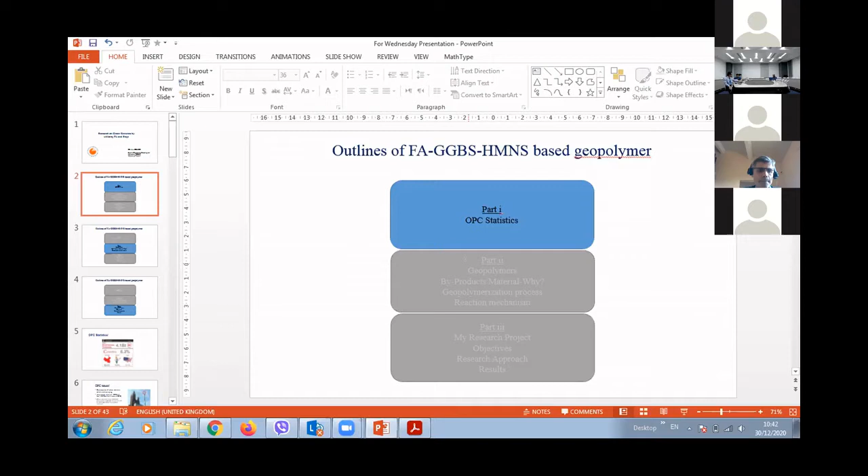The first section gives some statistics and issues about OPC. Then we move to geopolymer or alkali activated materials, the process and mechanism. The last part covers the research objective, research approach, and results.

Starting with the first part, statistics about OPC: as you see in this picture, the production of OPC keeps growing dramatically in the world. According to statistics from 2017, the production worldwide is 4.1 billion tons. That production is mainly divided among 3 main regions in the world, coming first China, followed by India, then the US.

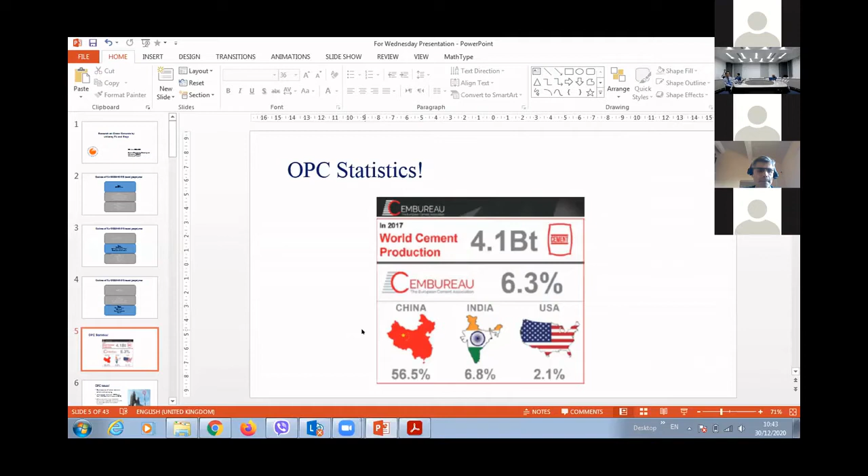This mass production of OPC creates a lot of problems and issues. These issues can be described in the consumption of natural resources, because it requires quarries, and also intensive consumption of energy. To produce 1 ton of OPC requires more than 125 liters of fuel and more than 118 kilowatt hours of electricity.

The second main point is the emission of CO2 into the atmosphere. About 8% of the world's CO2 emissions come from the production of cement and concrete, which is 3 times more than global aviation. Also, the main properties of products made from OPC give very poor immobilization of contaminants when used in different environments, and cannot resist harmful chemicals when put in the soil or ground.

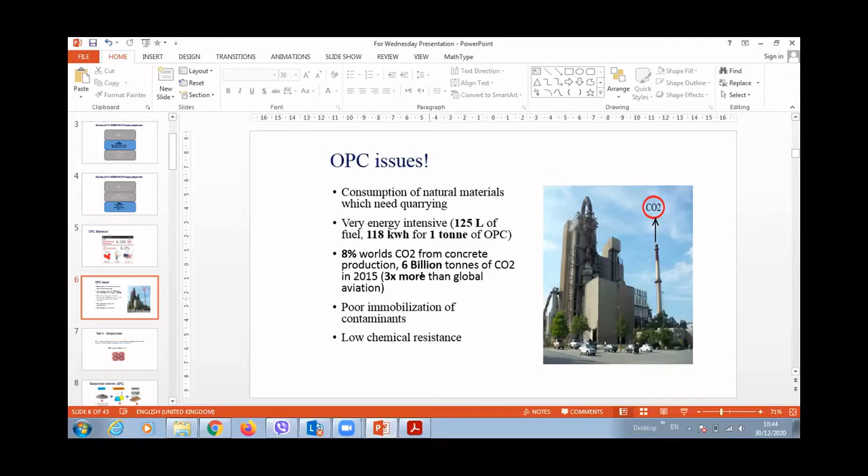Moving to the second part, geopolymer, or sometimes called alkali activated materials. What is it? It's a family of mineral binders.

These geopolymers mainly share one common property, which is the crystalline phase or amorphous phase of each mineral. It is very similar to zeolite, because it has a combination of silicate and aluminum present in amorphous form or microstructure. For this reason, it has properties very similar to zeolite.

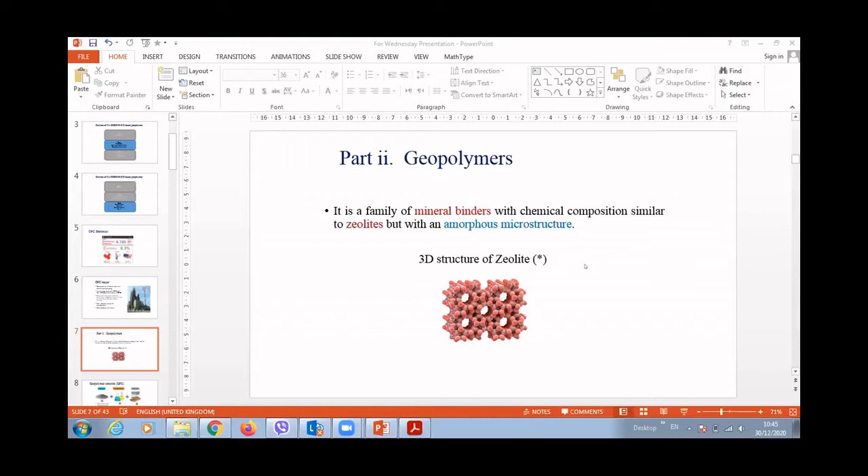In a simple way, what is geopolymer? It's a combination of a raw material, generally precursors coming from byproducts, then activating this raw material using different chemical solutions, mainly alkaline solutions, and then adding a filler like aggregate or sand to produce or obtain your mortar or concrete.

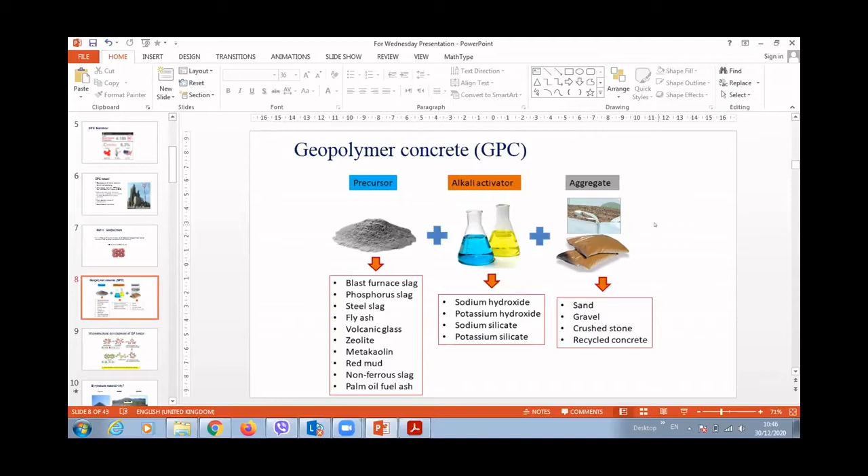What's the main mechanism in geopolymer or alkali activated materials? It's mainly based on how the chemical solution reacts with the binder. For example, if we use an alkaline solution based on sodium silicate and sodium hydroxide, that solution will dissociate the material, mainly fly ash or slags, and that dissolution produces anions and cations, which react together to produce a gel.

We call that the gelation phase. That gelation phase, with more rearrangement and orientation, builds new bonding and new links, formulating the growth or polymerization process, then the hardening process.

So why byproduct material? We can see that the main byproduct materials that exist widely in the world are fly ash, and other slags like magnesium slag, kaolin clay, rice husk, or different other materials.

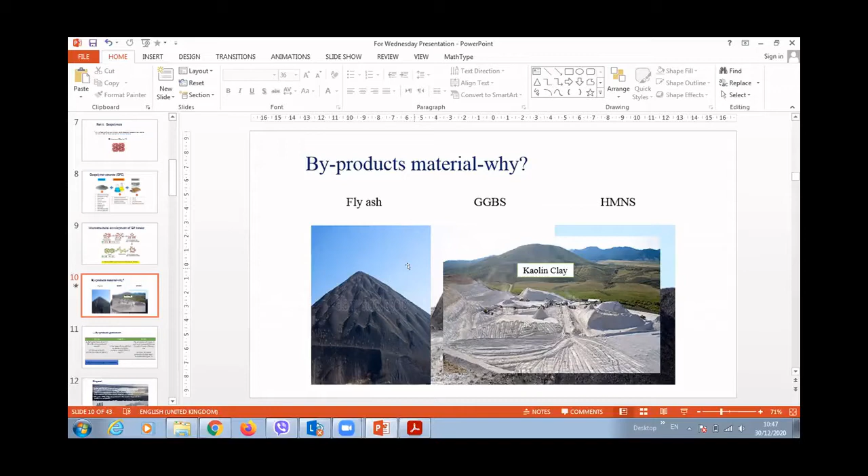So why this raw material? Some statistics present in this table show the massive production of each single raw material or byproduct material in the world, coming from the US or different countries like the EU or China. All the numbers here are in million tons.

For example, fly ash in the US production is more than 131 million tons yearly. In the EU, it's more than 125 million tons a year. And the quantity is quite double in China and India alone.

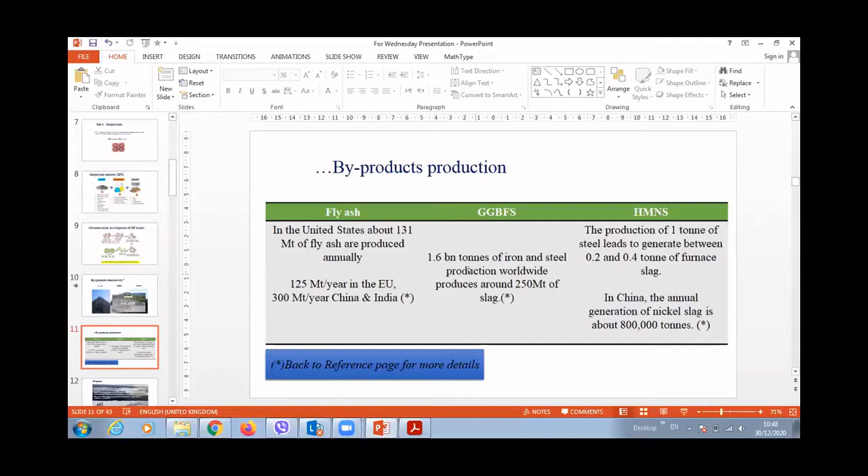The same for steel, the production is 1.6 billion tons of iron, which can give us or produce 250 million tons of the slags. So the ratio between, for example, the slags and the main materials comes from like steel is like 0.2 to 0.4.

So the main problem proposed by this waste material or byproduct material in the past was disposal. The fly ash, for example, used to be entrained in the flue gases and released at the atmosphere. But new legislation in the US forced and required the producer to capture that fly ash and recycle it or dispose it in controlled places or areas.

However, more than 65% of the fly ash produced in the world is disposed in landfills or ash ponds.

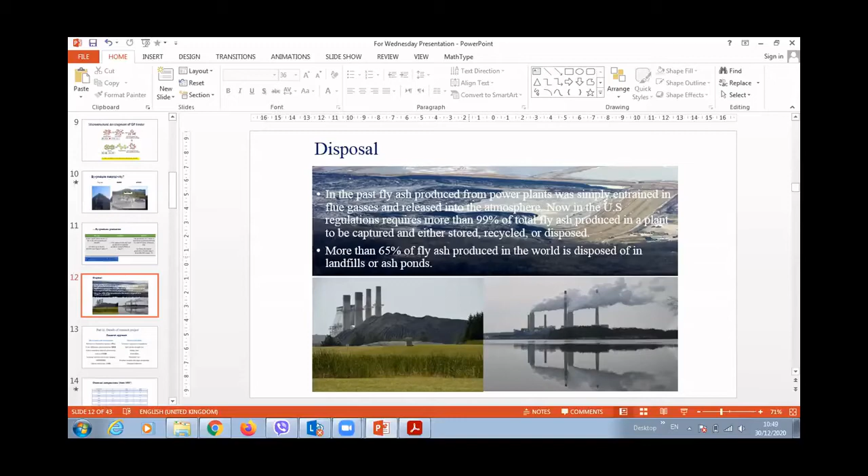Hello. Yeah. You have some. Yeah. Yeah. Okay. Because I can't hear anyone.

So moving to the third part, about the research project and the results we came out with.

So the research approach was divided into investigations in micro/nanoscale and macroscale.

So for the nanoscale, it's the characterization and defining which kind of material and final product we use. We follow particle size distribution analysis (PSA), X-ray diffraction, XRF for chemical composition, FTIR for bonding, and for microstructure we use SEM EDX, and also optical microscopy for the concrete to see the bonding between the aggregate and the paste.

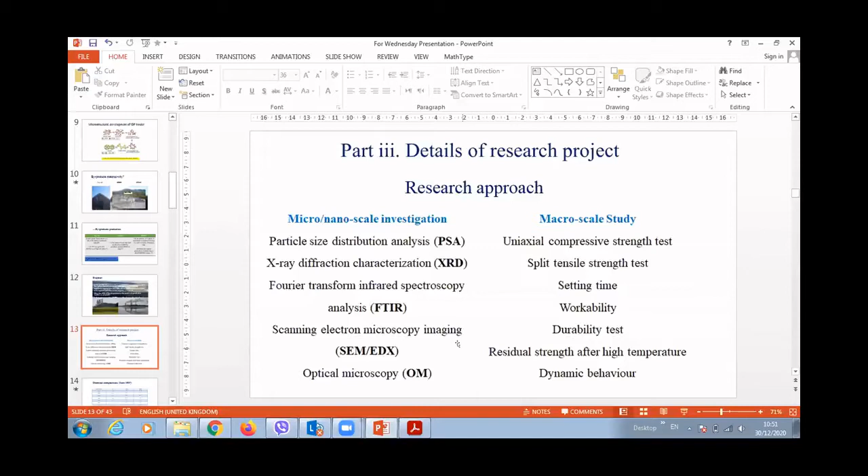On the other hand, the macroscale study focused on hardened properties: compressive strength, splitting strength, and fresh properties like setting time and workability. We also studied durability using a chloride diffusion test and residual strength when the product is exposed to high temperature up to 1,000 degrees, and we studied the dynamic behavior of the paste.

So it's the highest value when loaded with GGBS. Certainly, when combined and loaded with high magnesium slag, the optimal formula we obtained was GGBS loaded with high magnesium slag. It gives us, with 10% from the magnesium slag, the highest compressive strength, 60 megapascals at 28 days.

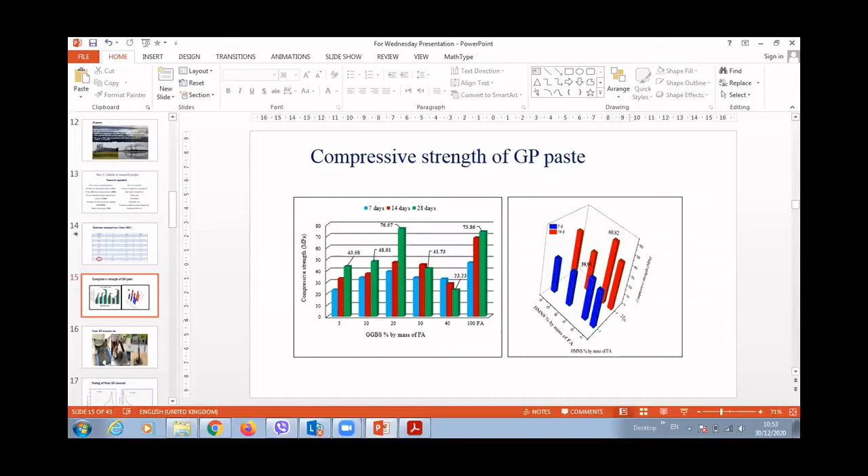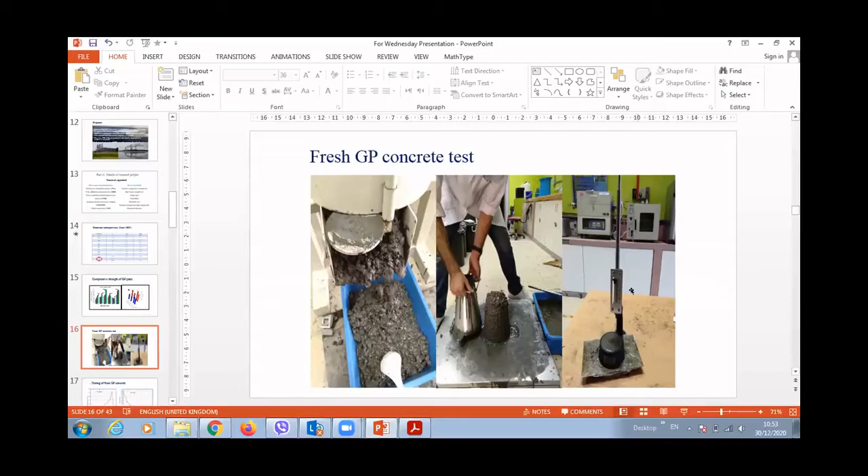For the fresh properties, we tested the slump test and the setting time, for paste setting time and slump test for the fresh concrete, as you can see in the pictures. It has a very good slump, as shown here. For setting time, it's quite longer because this tests for the paste only. Usually the geopolymer has a very long initial setting time, then quickly hardens at the final time. For slump, we used repetitive slump tests to see how it keeps its slump with time.

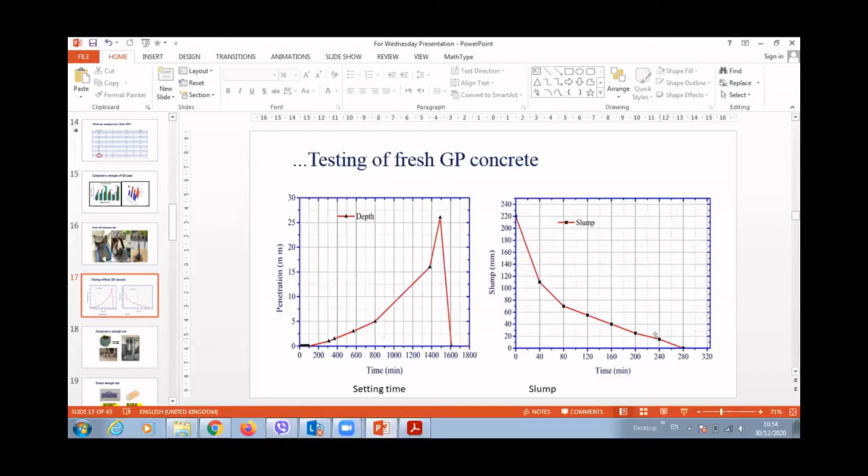After 40 minutes, we did different slump measurements to see what happened. The initial slump was like 22 centimeters, very workable concrete with very good flowability. Then the slump reduced with time, but it kept its workability until almost 4 hours.

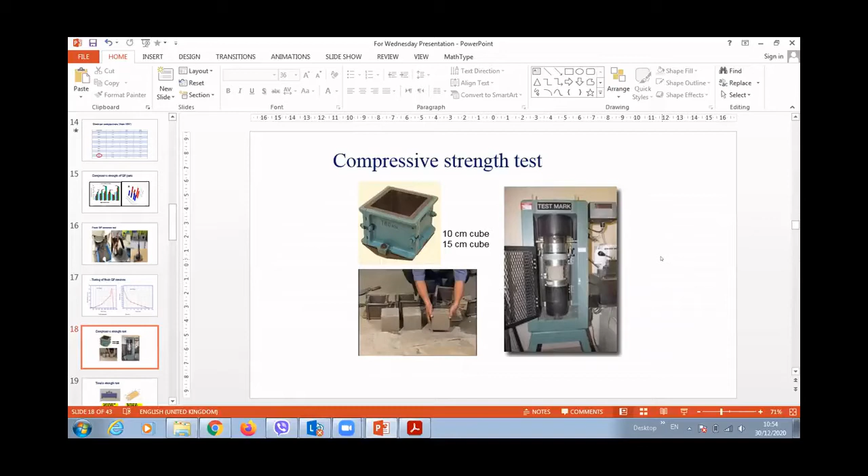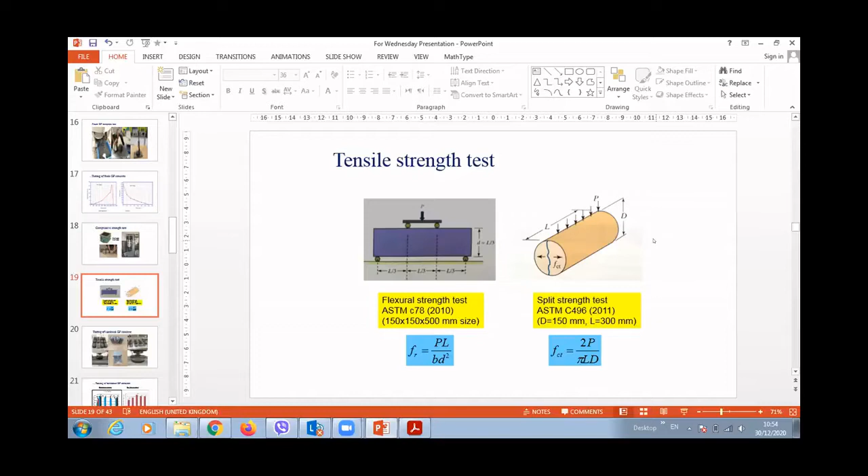This picture shows the regulation we followed to test the compressive strength: a cubic sample of 10 by 15 centimeters, following ASTM standards. For splitting, we used cylinders and calculated the splitting tensile for the concrete. The cast samples, as you can see here, are both cubic and cylinders, and the tests were carried out.

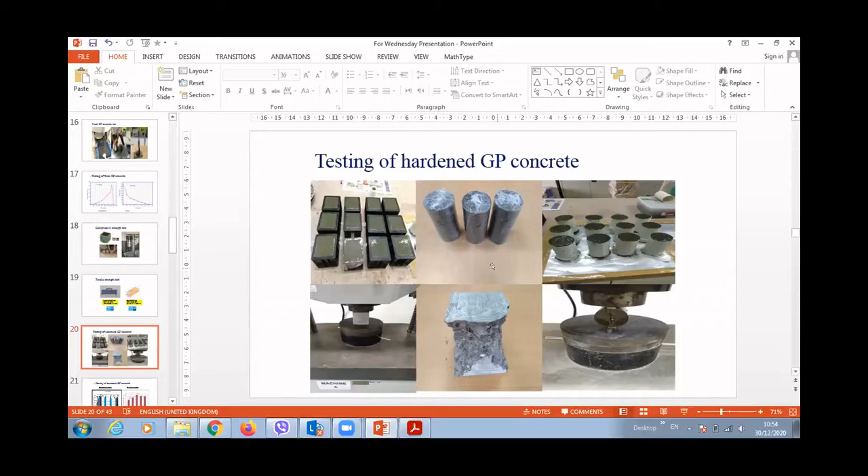This is the result for compressive strength and splitting strength for the concrete made based on the main formulation we found for the geopolymer paste previously.

What we found here is that the compressive strength increased with time up to 28 days, then there's a slight decrease of 8 to 10%. We believe this decrease in strength after 90 days could be due to the continuity of the geopolymer reaction with the alkali activator and the binder.

This is because the chemical reaction and dissolving process for the alkali activator of the raw material goes faster initially, then continues slowly, called microreactions. This produces more free water molecules in the system or main matrix, which of course will affect the strength with time.

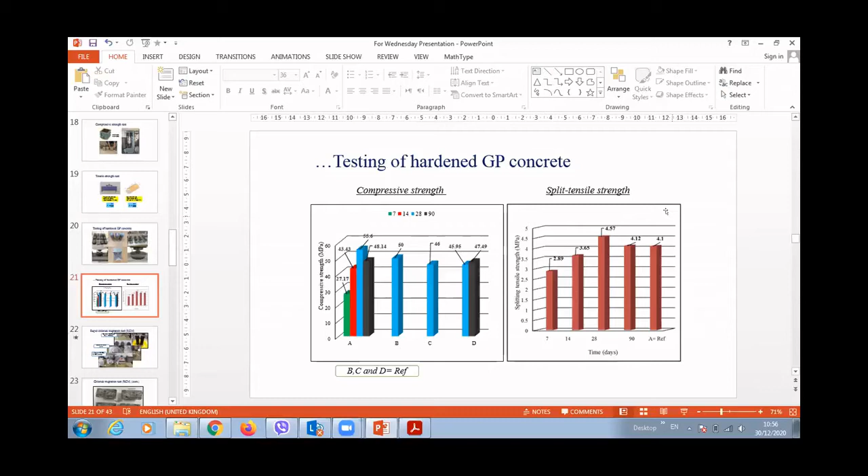The splitting tensile strength is shown on the right side. Because there's a linear relationship between compressive strength and splitting strength, it increased with time and decreased also after 90 days with a very slight decrease. But both results are very good compared to OPC.

The other test we carried out is the rapid chloride migration test for durability. We used a disc of 5 centimeters depth and 100 millimeters (10 centimeters) diameter. It was saturated inside calcium hydroxide to prevent any migration of other elements, cations or anions through the system after the vacuum process.

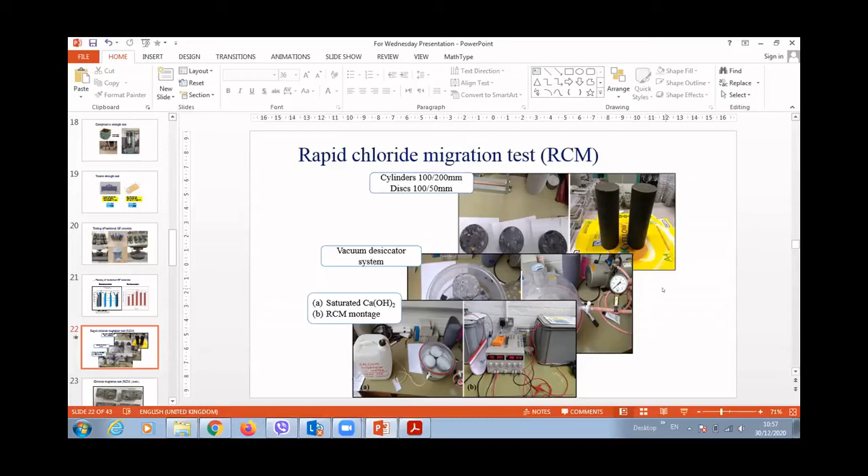Then we saturated it inside the mechanism or system, left it, and ran the test, getting results after 24 hours as per the regulations and standards.

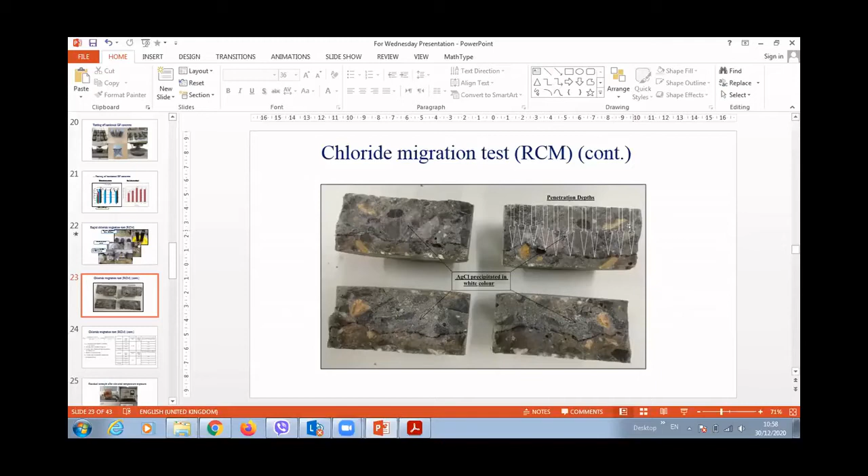So when we get the cylinders, we wash them, dry them, then split them axially and apply a nitrate solution to see the color change, because the nitrate reacts with the chloride that has migrated or diffused inside the samples. We measure the depth following the standards, and use these measurements along with Fick's first and second laws to calculate the diffusion coefficient.

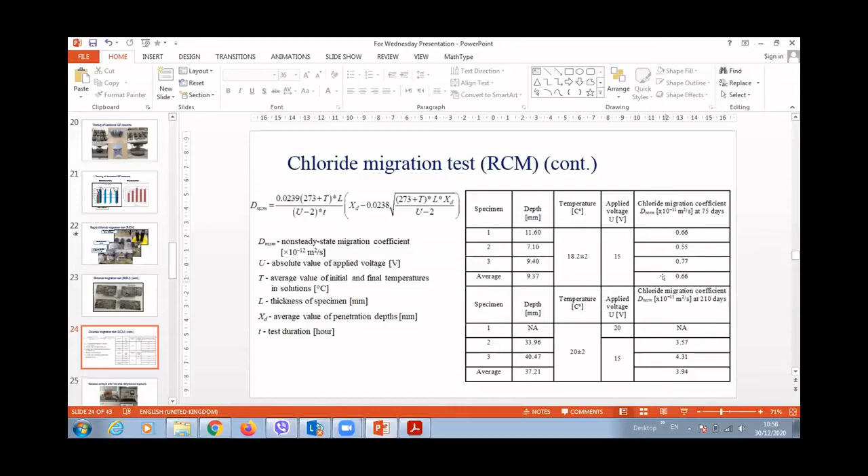The results give us a very good classification of the concrete, because the standards classify concrete as acceptable, good, or very good. For us, the classification was good, because the diffusion coefficient was very low.

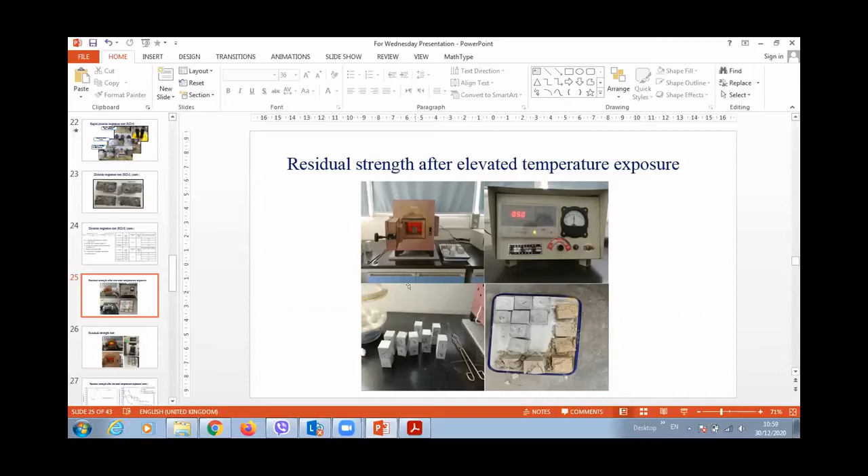The other investigation was about residual strength after exposure to very high temperature. This picture shows the electronic oven we used, with different samples cured for more than 3 months, then put inside the oven following this protocol: we heat the oven up to 900 degrees.

We put the samples inside the oven for 2 hours, then cool down just by opening the oven door and leaving them inside the room, and then go for the compressive strength test.

The results are compared against other results found for OPC and other geopolymer concretes with similar materials used. As we can see in the blue lines representing our results, the material we used shows very good temperature performance at different stages.

It has more stability compared to OPC or others. For example, from 300 degrees until almost 500 degrees, we have a more stable product, and then it decreases, but the decrease is slow, not a sharp or quick drop.

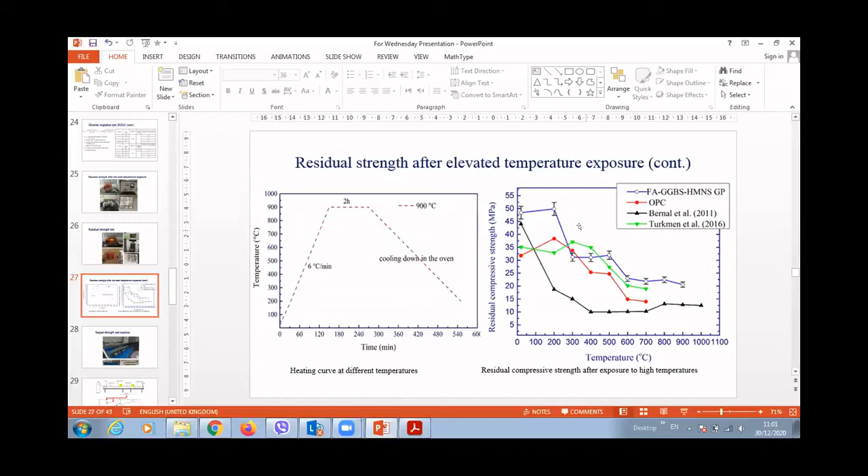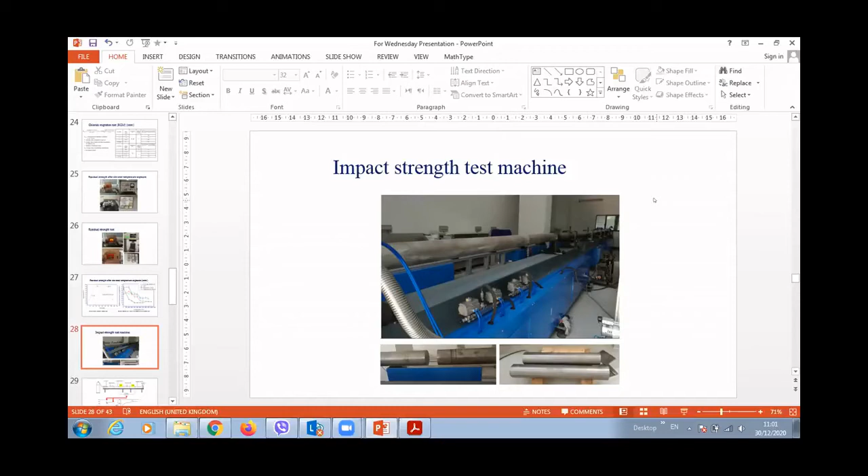The other main test we carried out is the impact test for dynamic behavior. We used the Hopkinson bar pressure test, which was carried out in China.

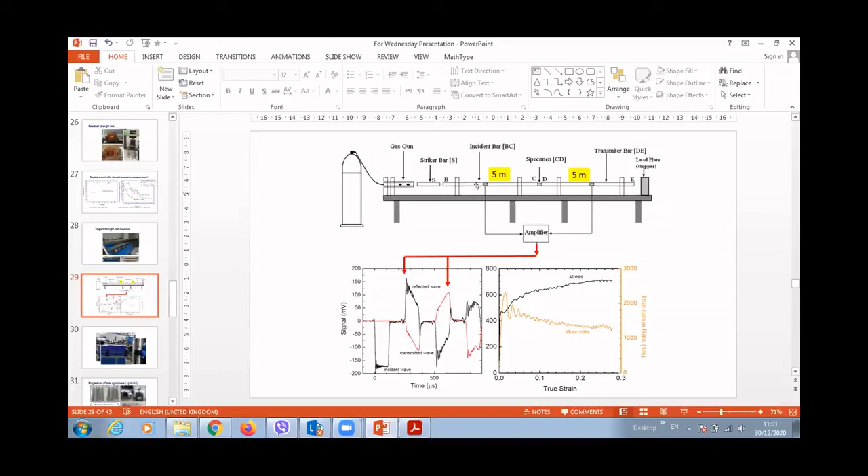The Hopkinson bar setup divides into two main parts: the first is the incident part, and the second is the transmitter part. Both parts are linked or connected with an amplifier to analyze the transmitted waves through the bars.

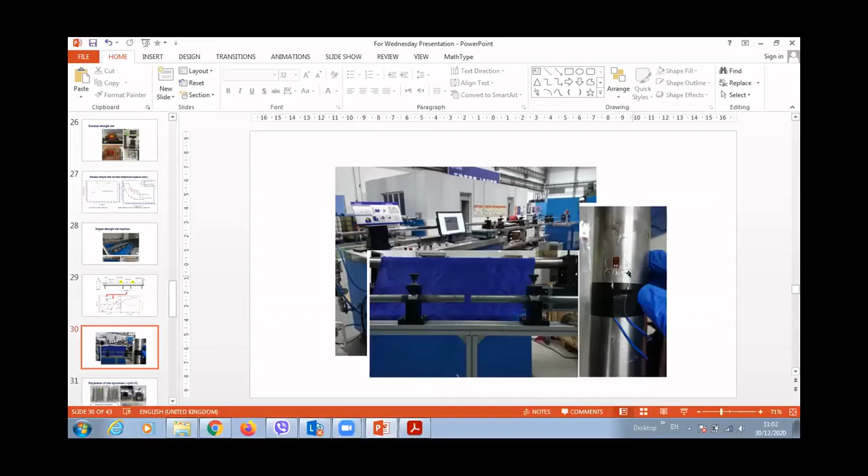To carry out this test, we need samples about 35 millimeters diameter and 18 millimeters thickness. For our case, we used 3 different diameters: 33, 36, and 37 millimeters. In each group, we used a different impact speed: 2, 4, and 6 meters per second. The samples were cut, polished, measured, and then put into the test.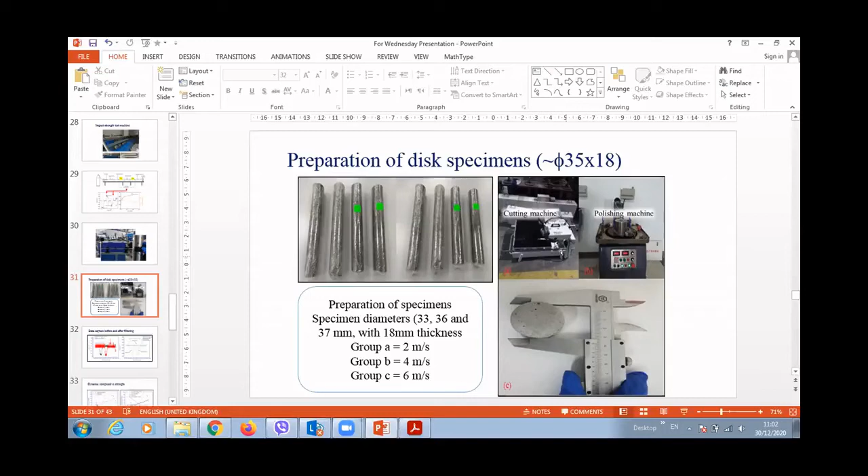Before carrying out the test, we need to calibrate the machine or equipment without any samples and filter the wave to see it clearly, as shown on the right side. The left side shows before wave filtering, and after filtering we can clearly see the wave of the incident side, the reflected wave, or the transmitted wave.

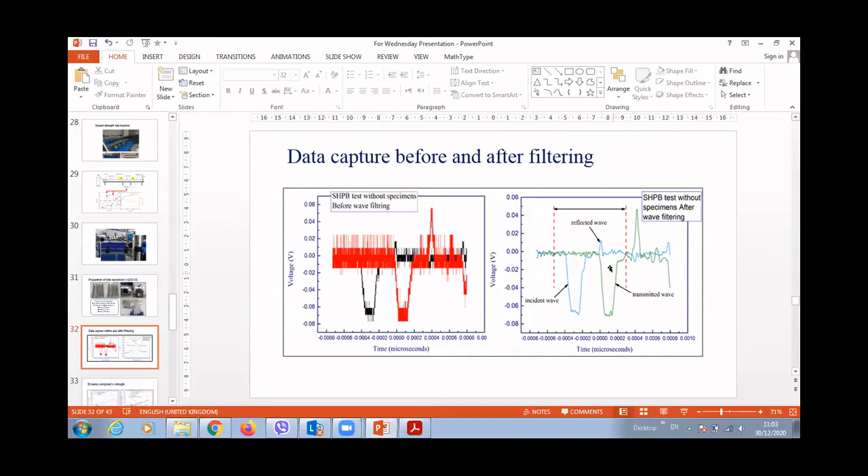Based on this information, we got the main data needed to analyze the behavior of our paste or samples. The main parameter is the dynamic compressive strength of the samples, and we can see here the stress against strain for all the groups.

We then applied the same strength and stress values found in other models, to see the convergence or difference between models that exist for concrete in general, not specifically for alkali-activated materials or geopolymers, and compared them with ours to see what the difference is.

So for us, we uploaded all of them in different groups, in different stress strain rates. We found that there is a very good agreement between our models in two different strain rates, which is limited by 63 per second, and then it goes for linear increasing.

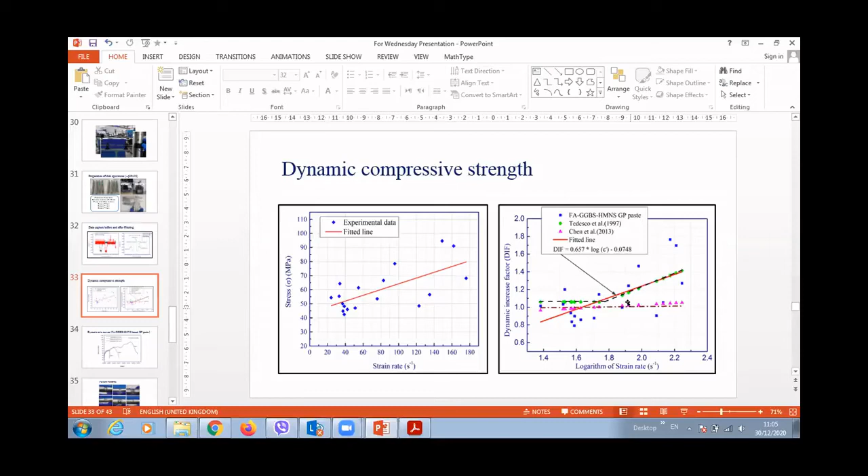This is explained by the curve of stress strain. This is an example for group 33 millimeters at different impact speeds. At the first stage we found that the curve has a very similar variation pattern, in which the stress first increased almost linearly with the strain, and this represents the elastic relationship between stress and strain.

Then it has a slow improvement, very close here to the linear stage, a slow improvement with the increase of strain, representing the hardening stage. And then finally, at the top, the stress reached the ultimate value and dropped quickly or harshly. This represents the compressive failure of the samples.

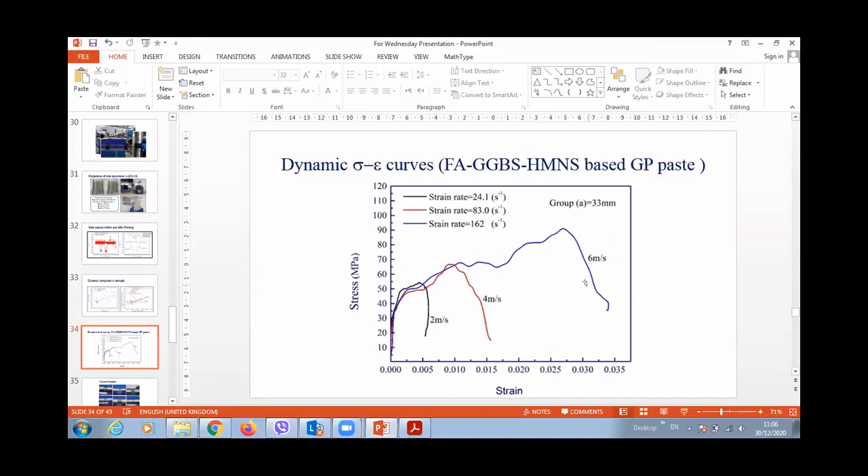To see this in reality, we captured pictures, because on each test we had a camera to capture the samples and the impact, at different impact speeds. We found that the samples crashed from big segments and big fragments into smaller, finer ones as the speed increased. And when speed increased, we found that the strength has a sensitive relationship with strain rate.

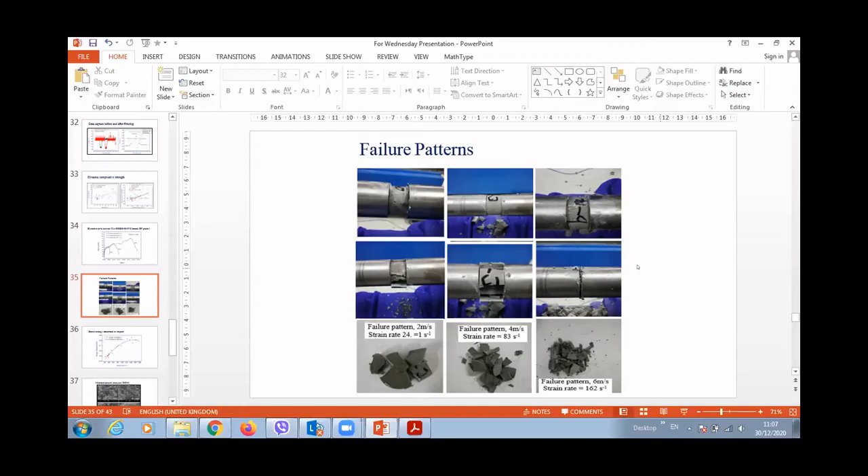This gives us an idea to analyze the energy, or the gained energy, or the energy absorbed by the samples during impact. The representation shown is a polynomial fitting. The energy absorbed increases with the strain rate until it reaches the saturation stage, where the sample shows failure or starts cracking.

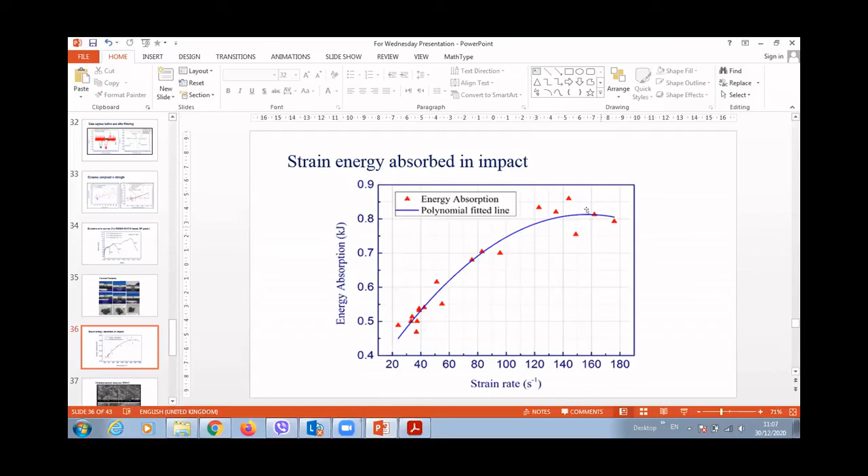The other investigation is microstructure analysis. We took samples from the paste and exposed them to SEM analysis to study which kind of gel or bonding exists. We found, as other presentations show, that there is always formation of C-A-S-H gel or N-A-S-H gel, and some samples show non-reactive or half-reactive fly ash, shown in spherical form.

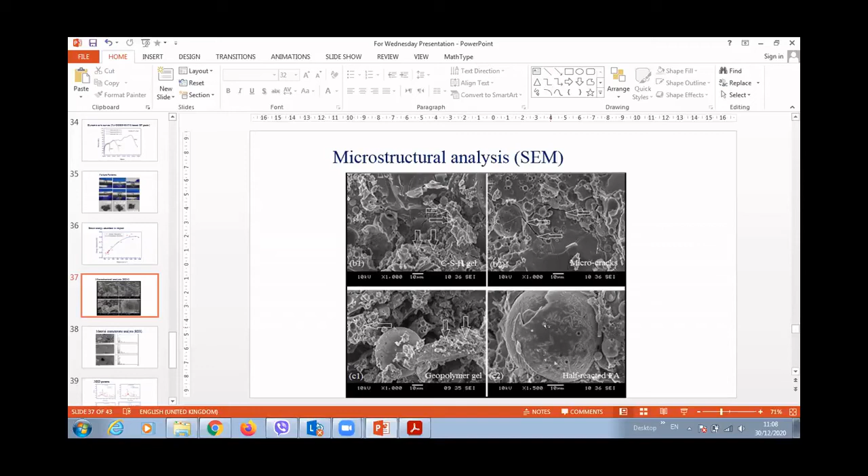This is because it takes a long time to react, as it has a relationship with the quantity of the alkali activator, or the ratio of alkali activator used. So the reaction process goes slowly.

To make sure that the different elements existing in the paste come from the raw material, we checked the EDX. It's not very clear, but the first image shows the presence of calcium, high calcium, which comes mainly from the GGBS. The second one represents magnesium. The third one comes from silicate or aluminum, from all of them. The magnesium comes from the high magnesium nickel slag, the third slag we used.

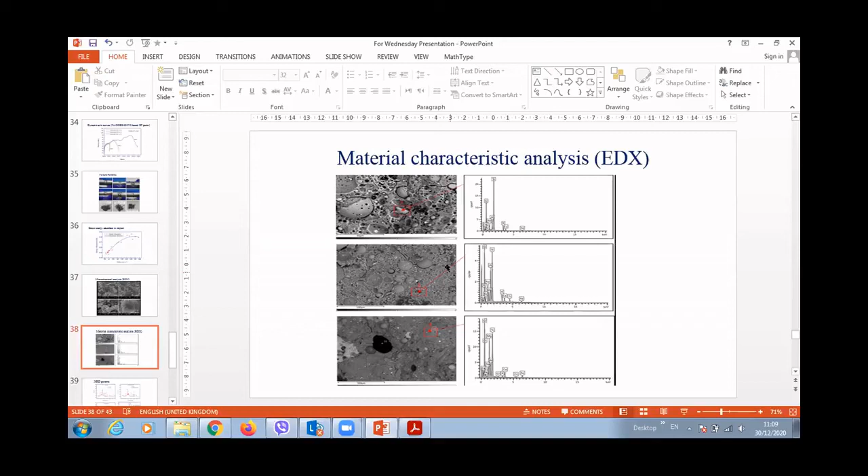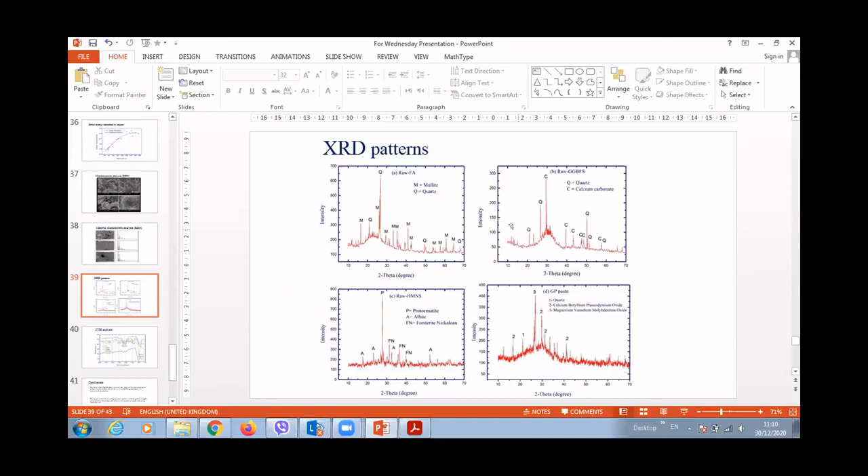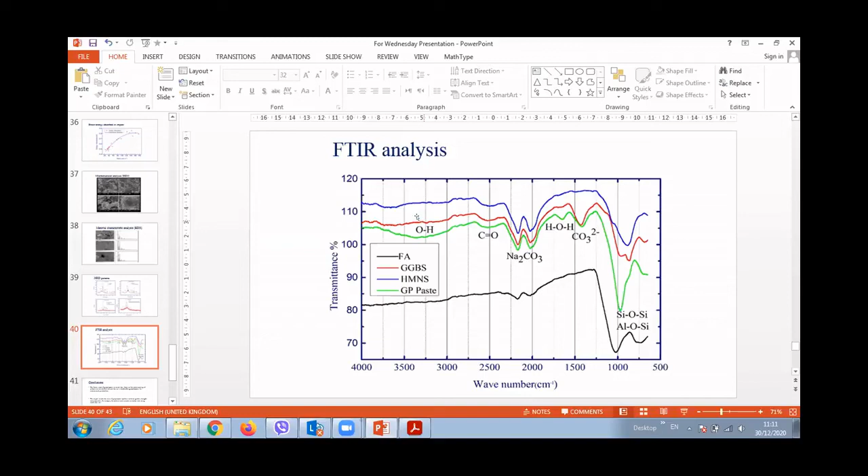This quantity of water still exists inside the mechanism, and it will evaporate with time, creating microcapillaries, making the paste or matrix weaker with time.

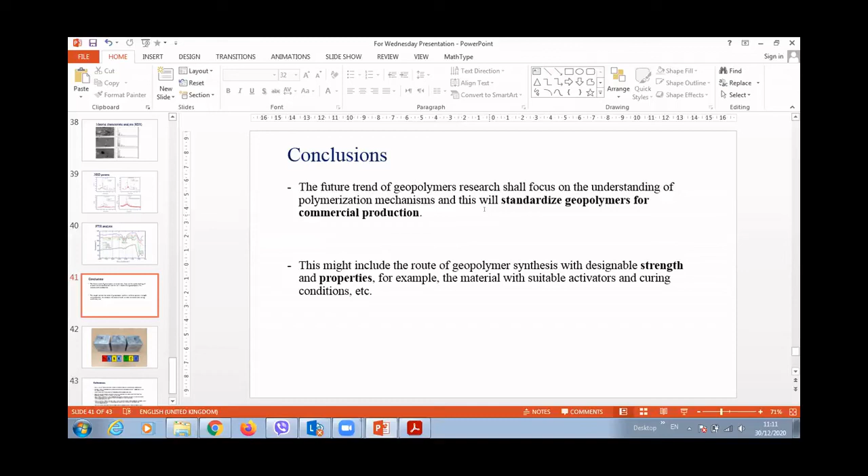Coming to the conclusion, we see that future trends in geopolymer research should focus on understanding the polymerization mechanism, which would help standardize geopolymers for commercial production. This might also include routes of geopolymer synthesis with designable strength and properties, for example, suitable activator solutions or other chemical activators we could use.